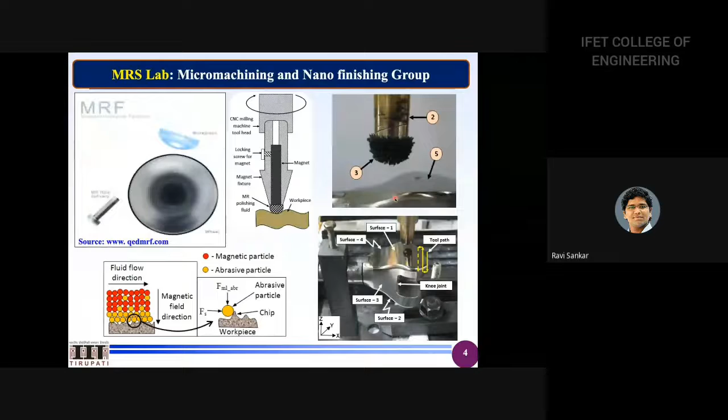So many more things are there in this one. This is magnetorheological fluid, which is externally energized - it needs external energy to energize. Otherwise, these are just liquids.

So there are liquids which are self-propelled. Those are called polymer rheological fluids, which you can come across.

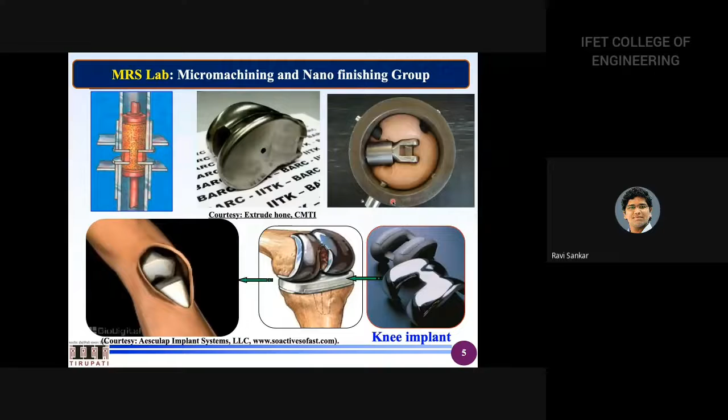I'm not going to explain this particular slide because there are a few slides related to this one coming up. So this has a capability to polish macro to micro scale features - I mean to say, micro features and nano features you cannot polish. So macro to micro features you can do.

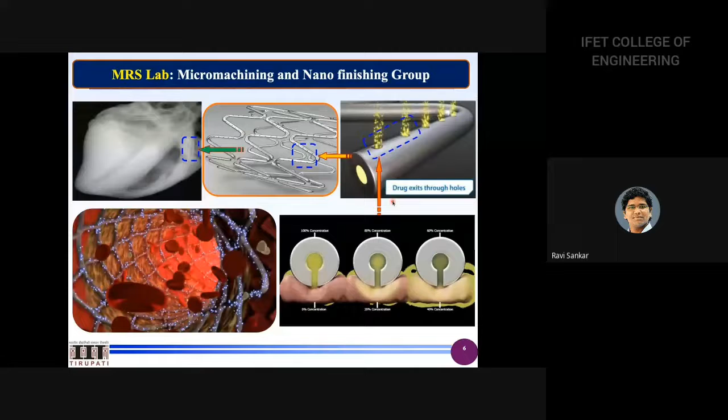Second is sustainable manufacturing. I don't know whether the video works. Okay, it is not working. Okay, so anyhow, the video is not working.

So whenever you do the machining operation, what is the advantage and disadvantage? The basic disadvantage is that a lot of temperature will be generated. To overcome this heat, what will you do? You will use cutting fluids.

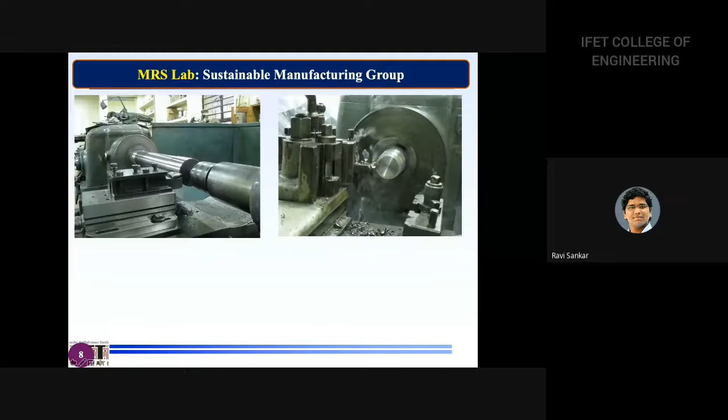Whenever you use cutting fluids, as you can see, this has a lot of emissions and the operator is standing here. These emissions have dangerous effects because these are carbon-based or crude petroleum-derived products, meaning the effects on emissions are similar to or more than those of petrol and diesel.

Why more than that? Because you are adding a lot of things. For example, what all do you add to cutting fluids? You add emulsifiers, biocides, high pressure additives - a lot of things to make a cutting fluid.

In an IC engine, you pour fuel and utilize it within 3-4 or 5 days. For example, if you take 1 liter or 2 liters of petrol, how many days will it last? Maximum one week.

But in this case, institutes will purchase a can of 20 liters of cutting fluid. The company knows that people will use it for a semester or two semesters. That means they have to use a lot of preservatives because you are going to add water to it. Whenever you add water to it, what will happen?

This has a very, very short life and microorganisms will form. To overcome that, people try to add biocides, which inhibit bacterial growth, fungal growth, and other things.

So this is positive, but on the negative side, those are chemicals. Whenever these chemicals interact with petrochemicals from pure crude oils, what happens? You get a lot of chemical interactions, and when these interactions occur at high temperatures like machining temperatures, it leads to chemicals which are very, very harmful.

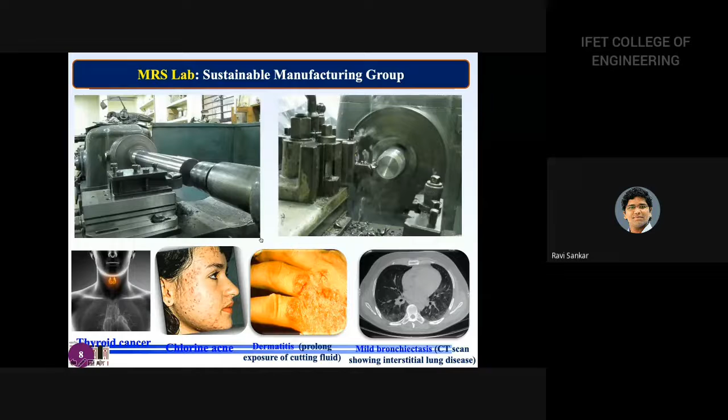You have to calculate that extrapolation. It is your primary responsibility not only to get profits for the company as an engineer, but also to protect your subordinates or working staff. My request is that you just need to give them appropriate safety precautionary things like mask, apron, and other things. I am not asking more than that, but this can save a person, and indirectly a family, since he may have parents also.

I am very thankful to IIT Madras for choosing this particular topic as a best paper award in 2017. This particular technology is about machining or micro machining using microorganisms.

What we try to do is take Acidithiobacillus ferrooxidans. As the name says, ferrooxidans has a lot of oxide molecules of ferrous. You need to culture it, populate it, and understand its life cycle most importantly. Then you can do photolithography of the surface, expose the surface, keep it inside, and get beautiful micro features exposed during the photolithography.

For example, you can see here micro nozzles and micro mixers, beautiful structures formed as per mechanical or micro manufacturing engineering. I'm happy about it, but I can also do the same thing with micro lasers and other methods, though in that case you will have thermally destroyed or thermally modified layers.

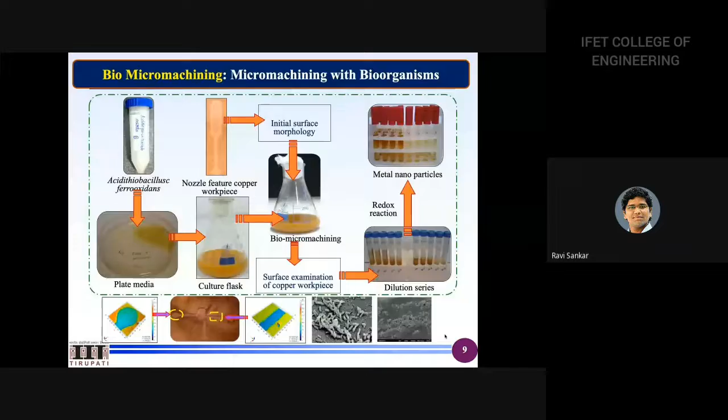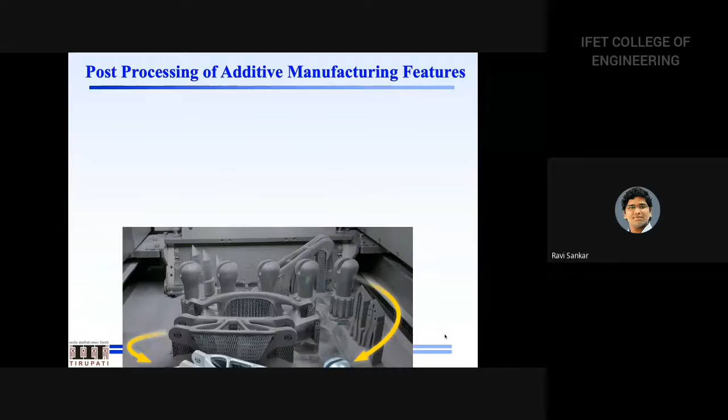Okay, so now we are coming into our business. This business is all about additive manufacturing. The additive manufacturing group works into various areas, and you can clearly see what additive manufacturing is all about. It is about conversion of any particular component that you are seeing here to this particular thing. If you can convert, you can use it into the practical application. If you cannot convert, you cannot use it into the practical condition.

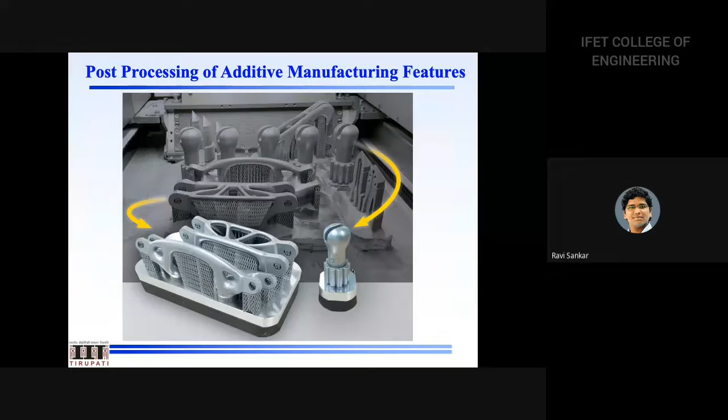So how to convert this to this, and this can be done by not a single process. You have to do multiple processes. What are the multiple processes? Basic additive manufacturing - we have powder bed system, direct metal deposition system, and the system with wire arc additive manufacturing and other things.

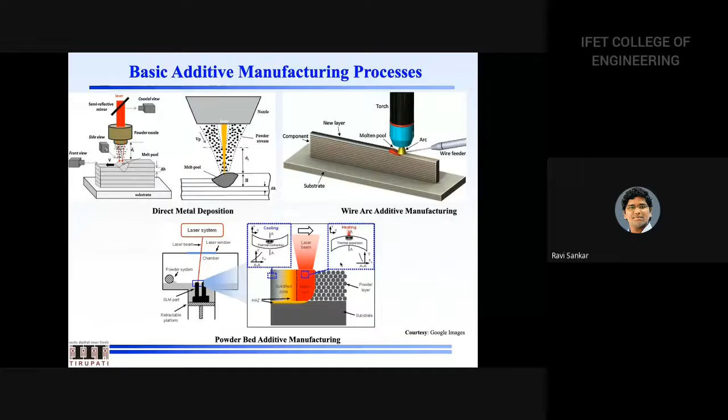Now you can see here selective laser melting and selective laser sintering. So many people get doubt, including me also - what is selective laser melting, what is selective laser sintering? If you go and Google it, because whenever you get doubt, the first and foremost thing anybody can do is Google. The first difference you will get is selective laser melting is for metals, selective laser sintering is for polymers, because nowadays polymer particle bed type of thing also is coming.

At this point, I would also like to tell you another hint about additive manufacturing. If your institute is going to purchase a 3D metal printer, I already said wait for 1 year. If you can wait for another year, you will get a universal type of additive manufacturing. What do you mean by universal type? I cannot really say universal type, it's just my way of expression. What I mean is the same system can do polymers, same system can do metals, same system can do ceramics also.

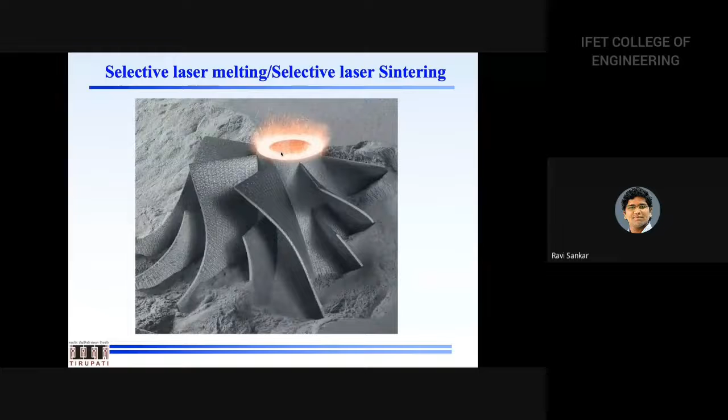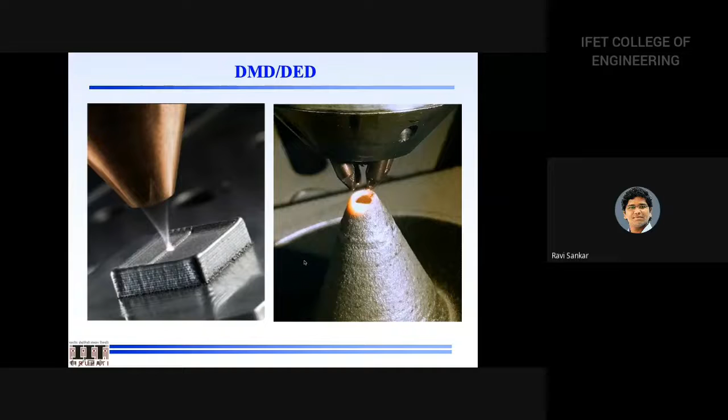Okay, so these are the various additive manufacturing technologies which you already know. What you might not be knowing is this particular direct metal deposition technology we will use. This particular technology we also use, as you can clearly see here, for bimetallic parts.

Steel on bronze, so this type of thing we are doing. As you can see here, whatever our students have deposited - H13, tungsten, niobium, these type of things. Currently what we have, the component is bimetallic components. So bimetallic components you can also do by WAM, wire arc additive manufacturing.

At this particular junction of time, wire arc additive manufacturing is widely used for large components. But forget about large components - you are sitting in a private engineering college, how can you do it? I was surprised to see one faculty in Andhra Pradesh, sitting in a private engineering college. Just this particular year, he sent me a message, I think 5 days back: 'Sir, this year I published 14 SCI publications with a top impact factor of 11.' I asked him, very good.

So what he has done is, he is working on additive manufacturing - a simple welding lab he converted into a wire arc additive manufacturing setup. So now you people who are all listening, from any state, it doesn't matter, this is open to you. You can convert your arc based welding system into a 3D printing system. Only thing is you need a hand, you can build on top of it, or you just have a rotary system and reciprocation system. These systems won't cost you much, like not more than 50,000 rupees or something.

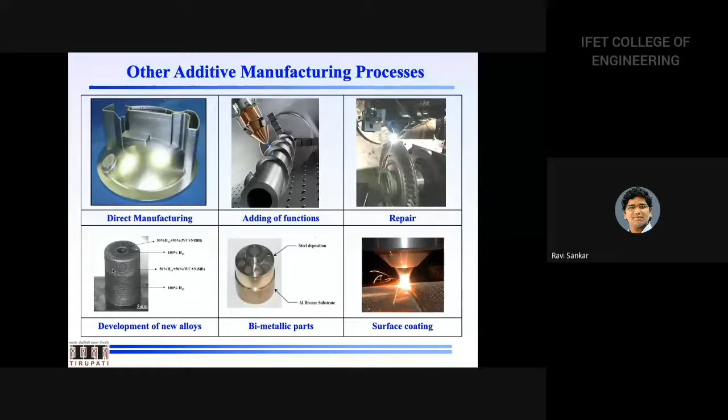Because we regularly do machining of additive manufactured WAM components, which are done by our colleagues.

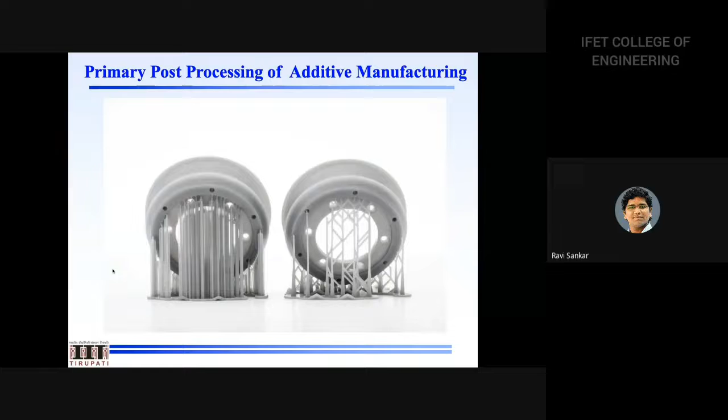Now, primary post-processing of additive manufacturing. So in polymers, the most important thing is that you need to remove the support structures. In metals, you need to dismantle your component from the base plate - that is another technology. For example, if you have built on a temporary build platform, you need to take that out. How do you take it out? One of the famous processes that we have is the wire EDM process.

Those people who want to work on wire EDM, at IIT Tirupati we have a 5-axis wire EDM machine. If you have any complex features to be machined using wire EDM, you can come. We have this particular system from Agie Charmilles, Switzerland. The worth of this machine is more than 1 crore rupees. So you people are most welcome.

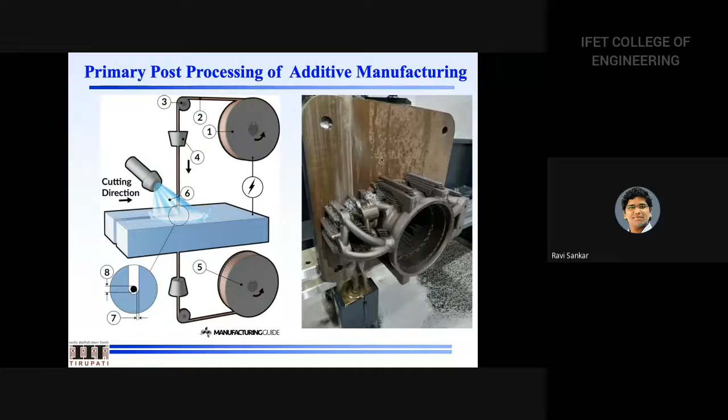As you can see here, how the component is dismantled - for example, you can see my cursor, this is the wire EDM and the wire. Most importantly, what you can get is our wires are so precise, like 250 microns, and these are stratified wires. Stratified means you have a sacrifice layer on top to make the component dismantling, or to cut a particular component into a perfectly shaped component.

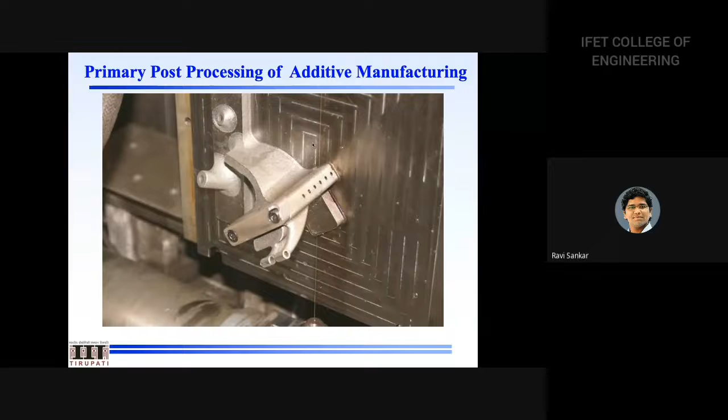The second thing that we try to do is machining of 3D printed surfaces. We not only work on machining 3D printed surfaces by lasers, we also work on electron beam and plasma beam for additive manufactured features and other things.

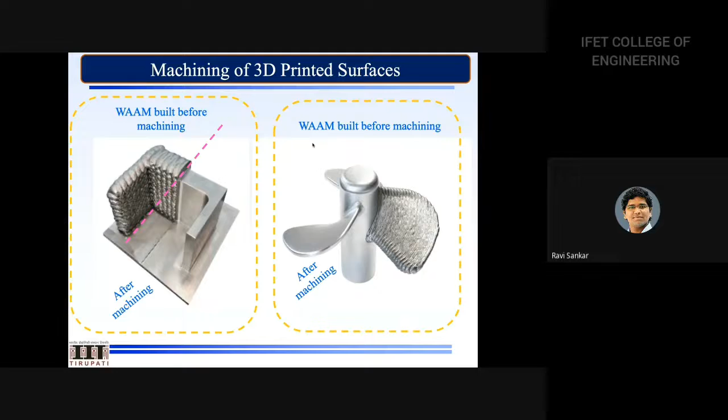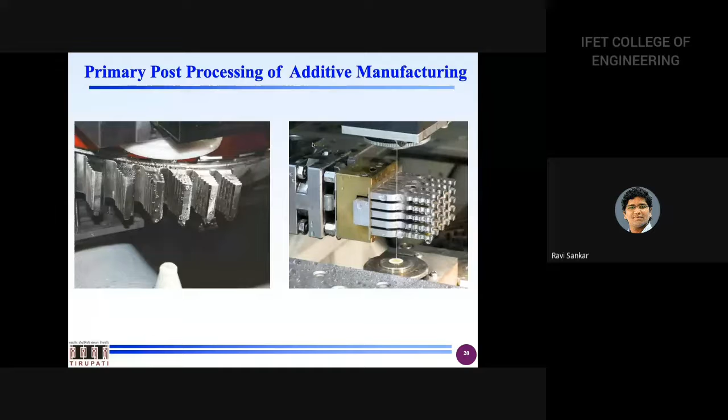So, machining and similar processes are the two big things required at the start of any particular component to be post-processed. Once you dismantle it, the surface roughness, if you can see here, is very, very rough. So how to overcome this?

If you take the surface roughness here, the levels will be, as per my understanding... I have a bad habit. Since 2002 I've been working in surface finish, so by seeing the surface finish itself, I can tentatively say how much it will be. Sometimes I'm right, sometimes I may be wrong. That's it.

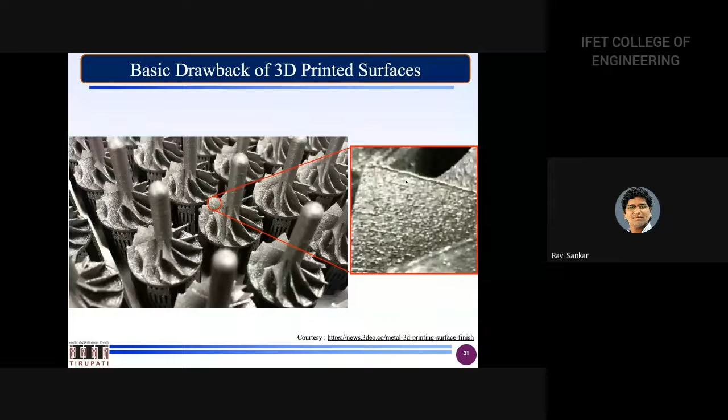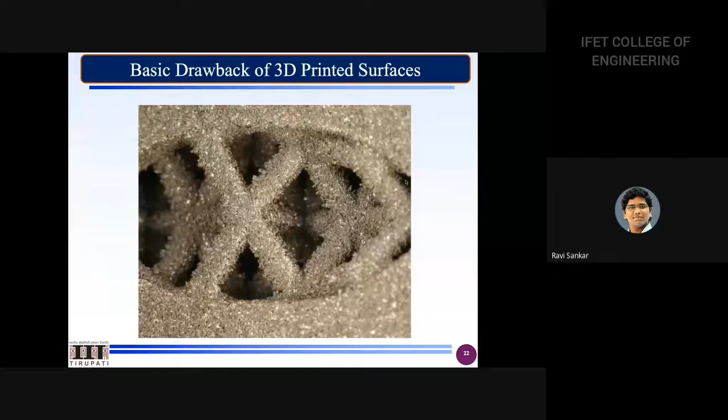In this particular system, I expect, and you can also clearly expect, it will be more than 20 to 30 microns. How to use this in practical application? You cannot directly use it. For example, take lattice structures - how do you polish lattice structures? They are very, very complex to polish. Till now, there are no good technologies to polish lattice structures and other such things.

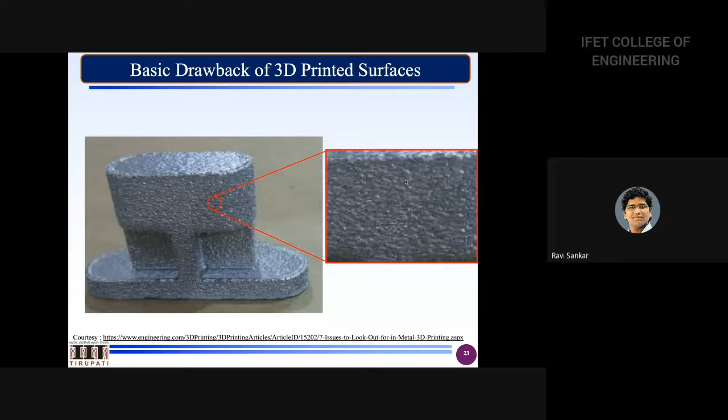So those people, if you can find... okay, now you can see here, I was just taking some tea. So, the drawback of 3D printed surfaces - now you can do machining as well as similar processes. That much you have done.

Another option for you is if your institute is well-rich. In Tamil Nadu, there are big, rich institutions. You can go for the DMG Mori Hybrid Machining Center, where you can deposit using a directed energy deposition system, and at the same time, on the same machine, you can also do machining operations. This is called a Hybrid Machining Center. But the price of this particular machine starts at 7.5 crores, so if your institute is rich enough, you are most welcome to go for this process.

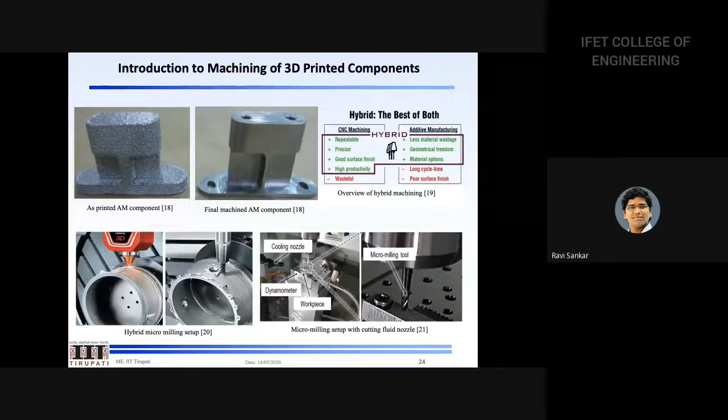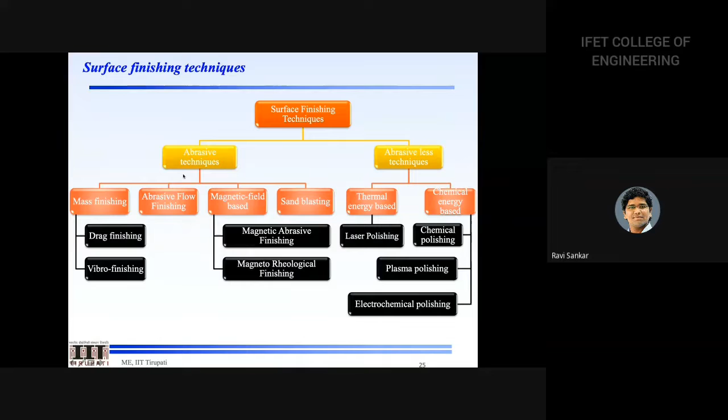Now, surface finishing technologies - we have abrasive finishing technologies and abrasive-less finishing technologies. These are the common post-processing technologies used in industry in India.

First, they will go and blast with sand blasting or bead blasting and other things. Second, if corrections need to be done on large surfaces, they can go for hand polishing, like with a hand grinder. If there are internal features not accessible by these methods, they go for ultrasonic polishing. If there are still some problems, you can go for electrochemical polishing or chemical polishing. Normally, chemical polishing comes first, followed by electrochemical polishing.

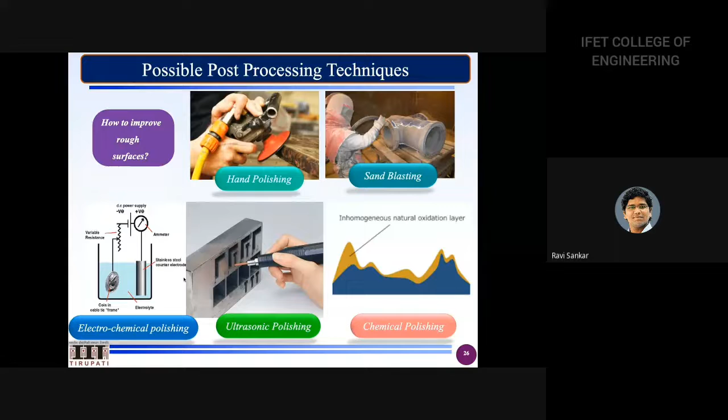Now, these are the standard protocols Indian industry follows. What about abrasive-less methods, and what are industries doing? Coimbatore is a very good industrial city where you can find technologies like chemical polishing of structures - there are chemical and electrochemical anodizing plants and other things. These are the common technologies people use for finishing normal components as well as additive manufactured components.

There is a startup at IIT Bombay called BETiC, headed by Professor B. Ravi, which manufactures implants and other things. If you want any institute to get that center, I don't know whether they will give it to a private institute or not.

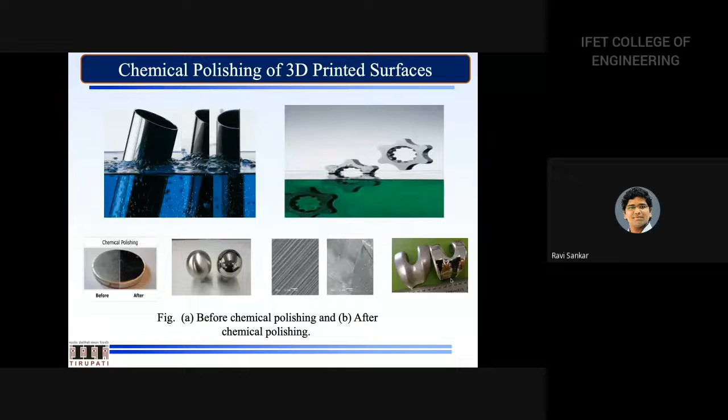So recently when I was discussing with professors, they said that if you want a center at IIT Tirupati, do let me know. They will help you people explore some technologies that you can use to open a startup company and other things. That is the information I can pass on.

Lattice structures are normally polished by chemical polishing or electrochemical polishing only, because these are very complicated in nature. For example, these are the surfaces as 3D printed, and after polishing, it will look like this.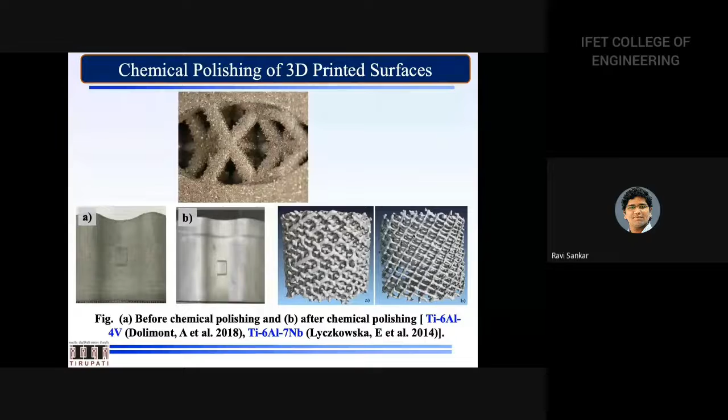These are very complex, and currently in India we don't have such technologies for polishing lattice structures. If you have external surfaces, it is very easy to do the polishing and other things.

Laser polishing is another area where we extensively work, because currently we are also procuring some lasers, multiple lasers, not a single laser. Some lasers are good because whenever you do laser polishing, it is laser remelting only. You already have a laser melted surface, since a 3D printed component is a laser melted surface from selective laser melting. So on top of it, if you do laser again, what is there?

Already you have taken a dip in Ganga. If you want to take a second dip, what is the problem? The first dip itself is a problem, you will get cold, like that. So in the second dip, what is the problem? Already you have taken a dip, you take a second or third dip, it's not a problem.

So already it is done by laser. Normally the laser used in selective laser melting is in the range of 400 watts to 700 watts, sometimes going up to 1000 watts, sometimes using multiple laser sources. As per our systems, we try to use a maximum of 100 watts, if not 200 watts. Why are we using this? Because it is contact free and eco-friendly.

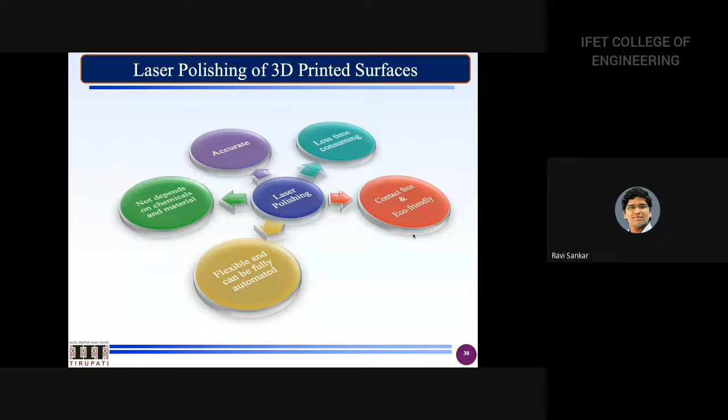Laser polishing is less time consuming and accurate, because it is accurately controlled and does not depend on chemicals and materials. It is flexible and can be fully automated. There are two systems we are procuring: one for laser polishing, another for laser shot peening, because you can do polishing by that technology also. Let's see how the mechanism works.

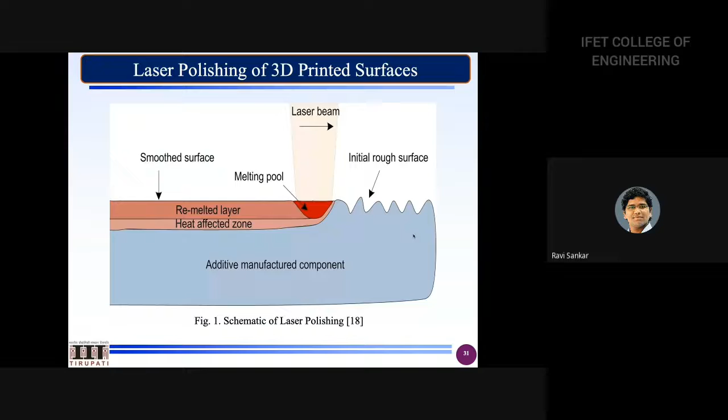The laser smoothing effect you can see here is purely a remelting process. A molten region already exists, you are just concentrating on the peaks and doing material remelting. There are various input parameters here, and laser power is the primary parameter. How much power? As I was clearly stating in the previous slide...

The power utilized for the laser melting process or selective laser melting process is 400 to 700 or 800 watts, roughly 400 to 700 watts. On average, you can take around 550 to 600 watts as required. But here you require only 100 watts because you are concentrating on the peaks where the surface area is very small.

So the first parameter is power. Second is scanning velocity. If your scanning velocity is too high, partial melting will take place and fall into the valleys. So you should have appropriate scanning velocity.

Laser beam diameter is important, particularly for polishing. In laser beam melting or selective laser beam melting process, you concentrate to a point because you need an accurately built component. Here, you don't want that because you want to concentrate on a particular surface.

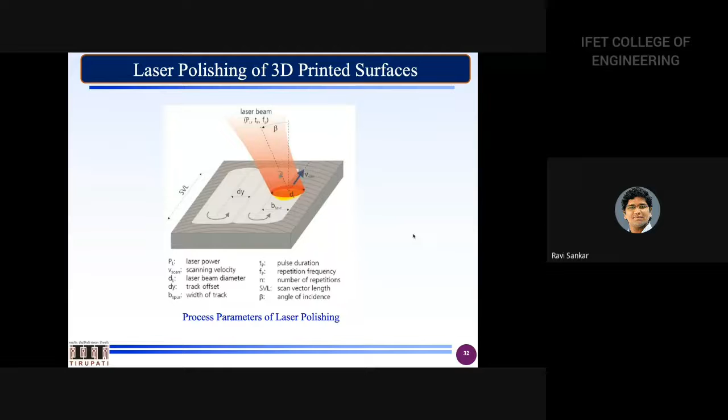Some people are also working on the angle of incidence. They do this because of the Gaussian beam distribution - if you see it, it looks like a 6 sigma curve. At the center it is very peak, and at the edges it is very less. That means you don't get proper melting and evaporation on both sides of the Gaussian beam distribution, for which they try adjusting the angle so the central portion can again and again be applied onto these layers.

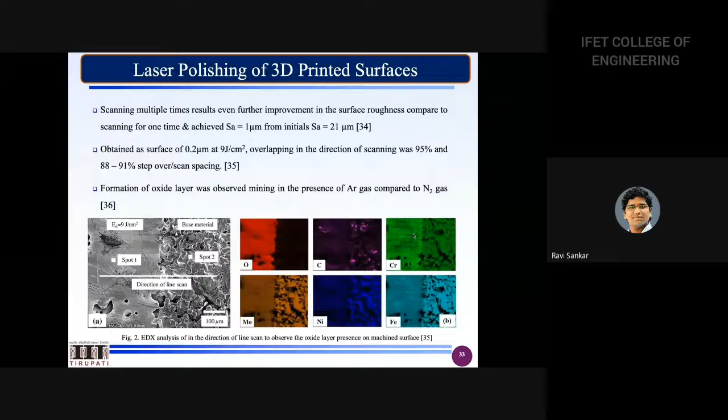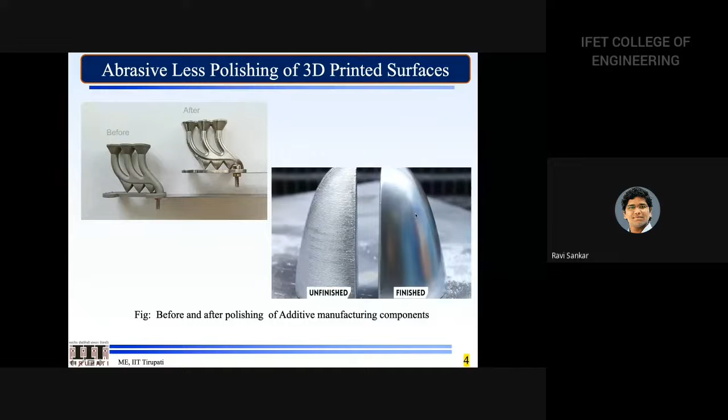Now you can see here, we have tried laser polishing on metals, but we want to do it on ceramics too. That's why we tried on ceramics like silicon carbide and others. These are the applications - once you understand the science, you can do a lot of these abrasive-less polishing techniques such as electrochemical polishing, laser polishing, chemical polishing, and so on. As you can clearly see here, this is the unfinished layer by layer deposition, and here is the finished one. So these are the applications of it.

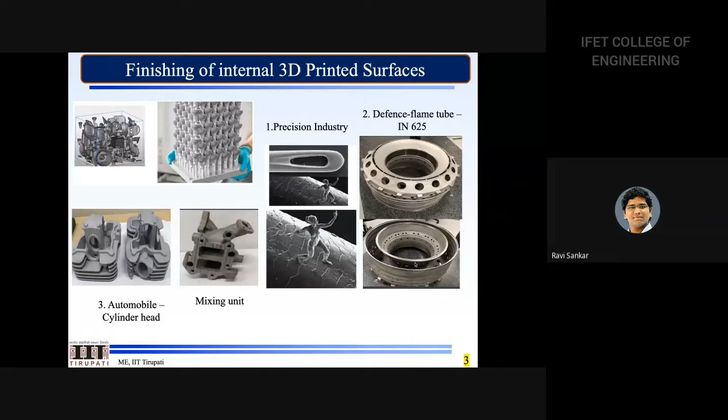Now we are moving into abrasive-based post-processing technologies, for complex features, internal features, and other things. The first and foremost thing you can do with abrasive is blasting or mass finishing operations like sand blasting, drag finishing, and other things. At IIT Tirupati we have a drag finishing system, which is yet to be installed - it came almost 3 to 4 months back, but because of scarcity of space, we have not installed it yet.

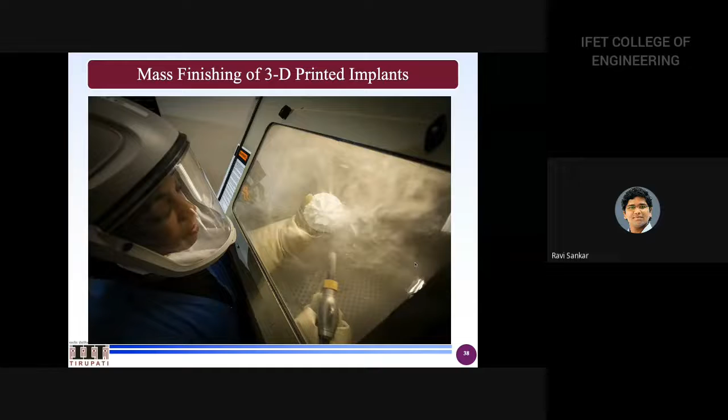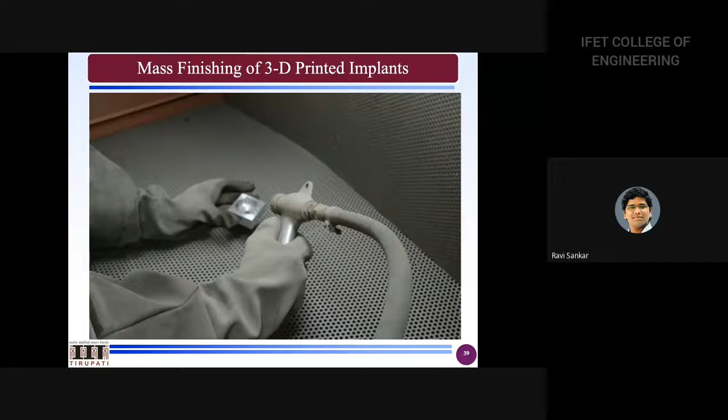This is called bead blasting or sand blasting, where you can remove particular particles by blasting, or you can also remove some of the supporting structures by these blastings. As you can see here, the components' internal surfaces and other things are done under a controlled environment or a closed loop system like a glove box and other things.

As you may be well aware, the surface roughness in additive manufacturing is very, very rough. Sometimes this is advantageous, so now you have to find those areas where it is advantageous.

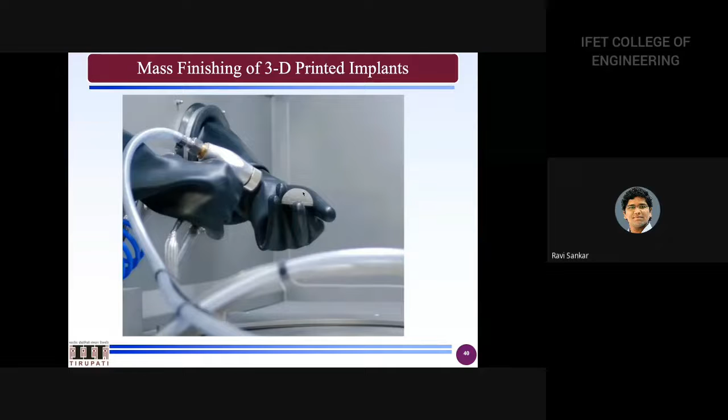One of the applications is the acetabular socket. For hip implant applications, it is very useful because you require osteoconductivity and osteointegration onto the top surface of your acetabular socket. You can clearly see here - your acetabular socket is here, and this particular surface needs to be very rough. Because this should be a biomaterial, and this will go and stick onto the top side of your hip implant, osteoconductivity and osteointegration will take place.

The second process you can see is vibratory bowl finishing, where you have a lot of abrasive particles, and you just rotate it. So whatever you rotate, automatically it will experience the finishing and perform the finishing operation.

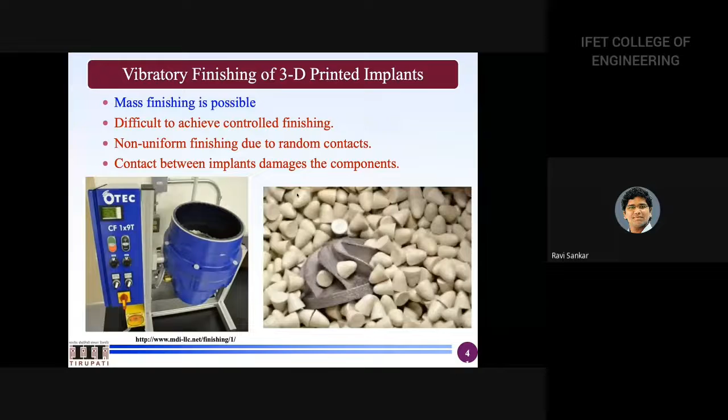Other processes include belt grinding and drag finishing. Drag finishing is one of the widely used processes for 3D printed components and for batch and mass production. The basic drawback in the previous system is that you dump everything into a bowl and rotate it, so there's a chance of component-to-component interaction. But in drag finishing, all components are fixed, so there's no chance of components hitting each other, and deformation problems won't occur. That's why people prefer drag finishing.

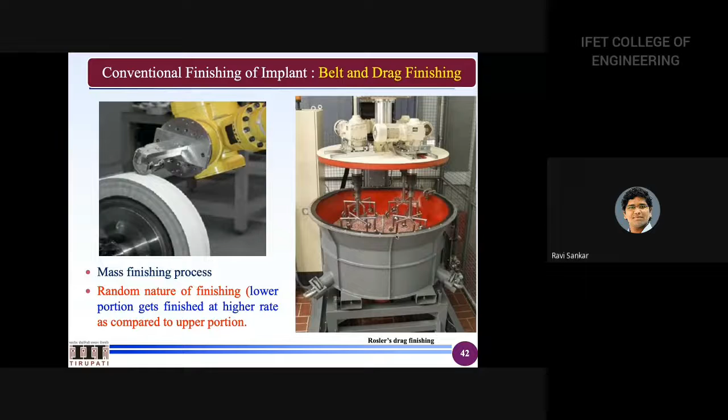As I said, Coimbatore is an industrial place, and many companies produce this type of drag finishing system. At the same time, additive manufactured features or implants can be finished by belt grinding and other processes, as you can see here.

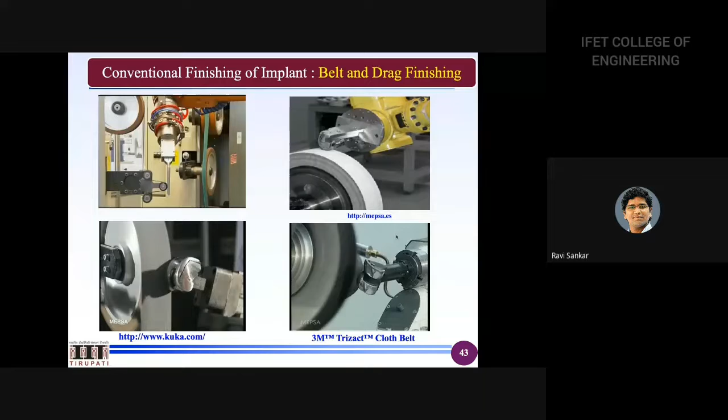There are multiple things one must understand here: interaction forces. For example, in this bottom two, interaction forces are very high because the material removal is very high. That's why you see a lot of spark and fire type effects. But here, in this cloth grinding process, you don't find that. So interaction forces always depend on what type of material you are using. Here it is a very solid one.

Here it may be a rubber wheel or a sponge type wheel where abrasive particles are put into a liquid mode or something, and that's why you see a lot of deformation. From this, you can understand that if you convert from solid to liquid, or a semi-solid, or a nearly porous solid, you can achieve less interaction forces.

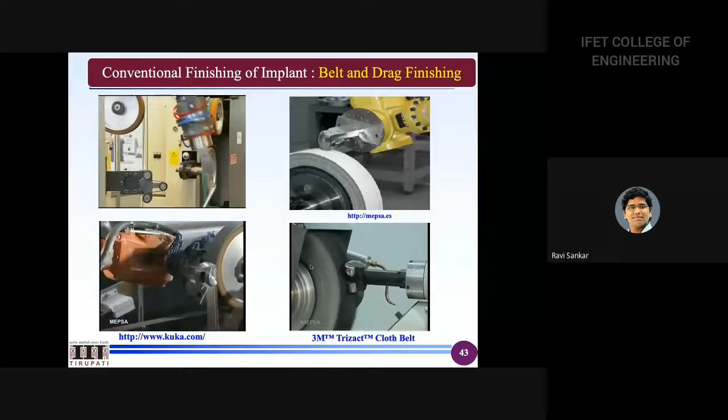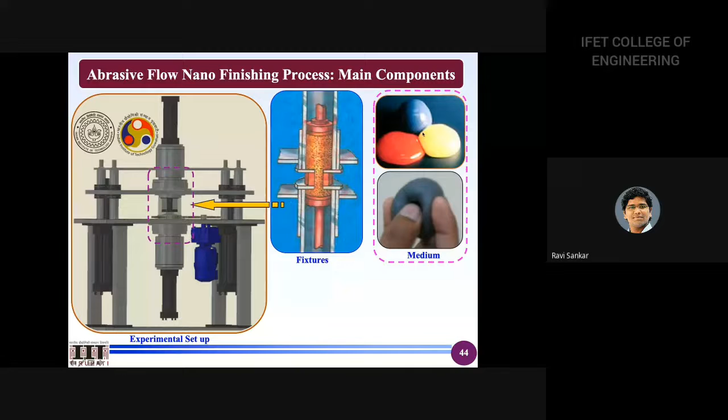The third and most important element is the medium. One year back we received a patent on this medium, and we are filing other patents in this area. We have multiple varieties, while commercially available mediums are only three. In our case, we have almost six to seven varieties of mediums.

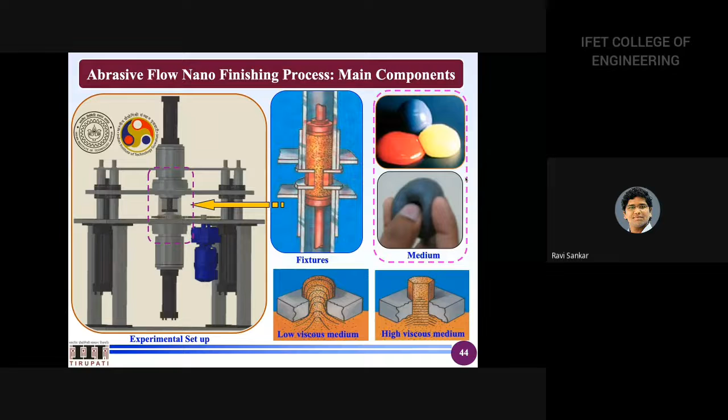There is a company in Coimbatore that regularly asks us for this technology. Because of some technical and non-technical issues, we are still unable to hand it over, but we have to go a long way to develop this system further. Currently we are at TRL 8. Whenever we give this technology to a company, we want to make sure we don't have to come back again, so before launching it in a full-fledged manner, we want to reach TRL 9. That's the reason I conveyed, and he was happy about it.

So this particular technology works in a simple way. I cannot explain the complete details of how the liquid works, but for example, I have this particular liquid, which is a semi-solid type. Whenever I apply extrusion pressure, the particles inside it, which are functionalized, act on the surface.

These abrasive particles, for example diamond abrasive particles, are functionalized such a way that your polymer network holds it. So what is this polymer network all about? This polymer network is a viscoelastic polymer, and whenever you apply a shear force in this direction...

What it will do is, it has a viscous and elastic component. The elastic component tries to move in the perpendicular direction, and the viscous component tries to move in the direction of applied force.

How do you know? For example, if you take water or honey or anything into your hand and throw it, what will happen? It will flow along the direction of what you have applied pressure. That is called the viscous effect.

Second, the elastic effect. Take an eraser - many of you are married and have children, so you have one at home. Just take an eraser and try to press it with your thumb. What will happen? It will try to move in the perpendicular direction.

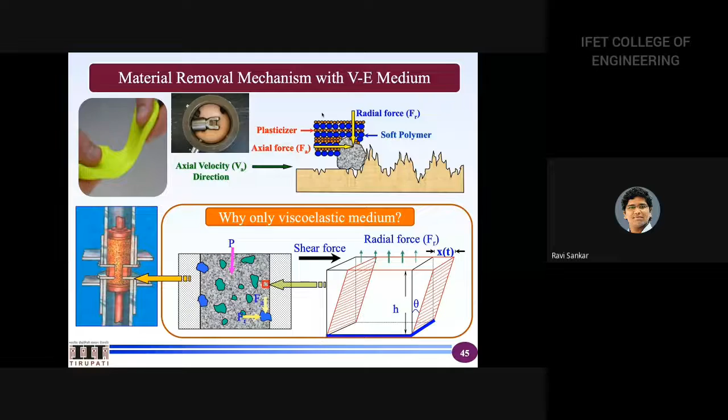But indentation velocity is much, much less compared to your axial velocity. That's why normally they don't consider the radial velocity. So this is about the materials, but these are 2003-2004 materials which we have already patented. That's why we are showing you.

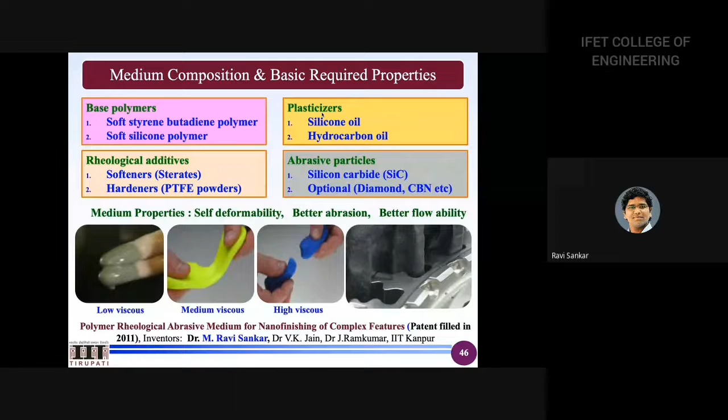Nowadays people are not accepting these things, however we have moved to the latest materials which I cannot disclose at this point in time. But the characteristics are: it flows like a fluid, jumps like an elastic ball, breaks like a plastic piece, and other things. Because of this, the uniqueness is that flow and deformation characteristics are very complicated in nature.

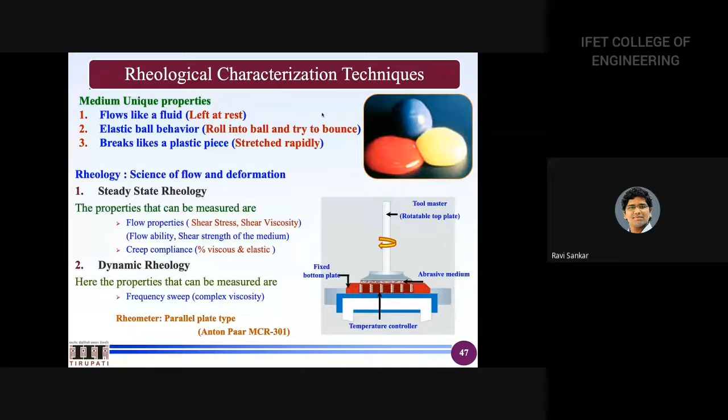For which you have to do rheological characterization. The rheological characterization - for example, the first and foremost characterization is flow studies: how it behaves while it is flowing. This is the flow behavioral study.

The science behind it is: you have elastically dominating viscoelastic materials, or purely elastic polymers - nothing in this world is perfectly elastic. So you have dominance of elastic characteristics because your polymer networks are near each other, so the inter-polymer molecular distance is less, and the force of attraction between two polymer molecular chains is very high.

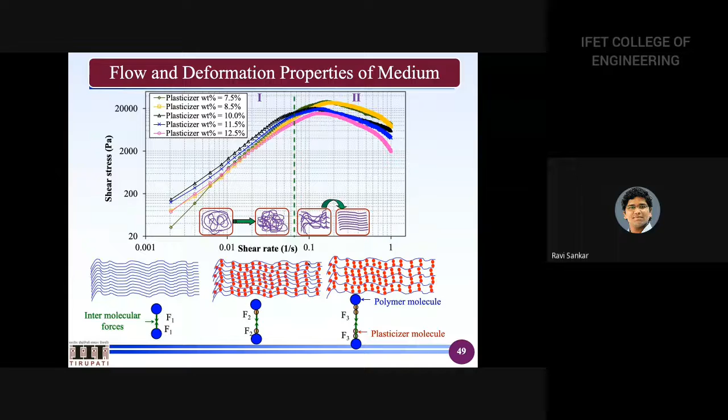So you need to use a lot of functionalizers, rheological additives, and other things. That is the bread and butter of the companies and patent technologies, which you don't find in the patents. Normally you will find the patents listing plasticizer, polymer, and other things.

So you may be getting doubt about viscoelastic and other things. Whenever you talk about viscoelastic, how to measure the viscous component is a big question, for which normally you can see on the time domain and frequency domain you have creep compliance. That means you are putting some stress and observing some strain. Now the million dollar question is: what is the stress that I have to apply?

For which you have to do the dynamic rheology, where you can change the shear stress and observe the storage modulus. Whenever you are observing, there is one region where there is no change in the storage modulus, that means my polymer molecular chains are at original state. If I use anything in this range, it is called the linear viscoelastic range, beyond which you can see non-linearity, and this non-linearity is because of polymer stretching or polymer breakdown.

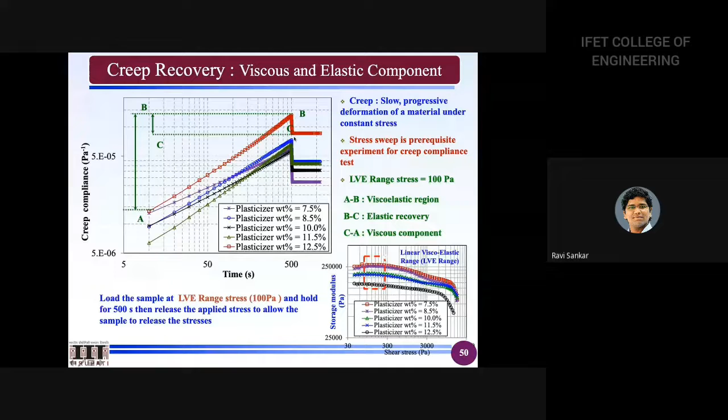So if I can take any particular value where the storage modulus is approximately same, that means my polymer molecular chains are at original state, neither broken nor stretched. If I take any particular value in this range and put it in the viscoelastic range, and I'm putting 100 Pascal here, A to B is viscous and elastic, and B to C is elastic. So now you can calculate what is the viscous component, what is the elastic component.

So now you can use percentages to show or observe how an elastic dominating medium and a viscous dominating medium works. In this case, if you take 35% viscous, that means 65% elastic. So elastic, as I said, radial force will be very dominating, and not only polishing, it also creates its own shearing marks. That is what happened here.

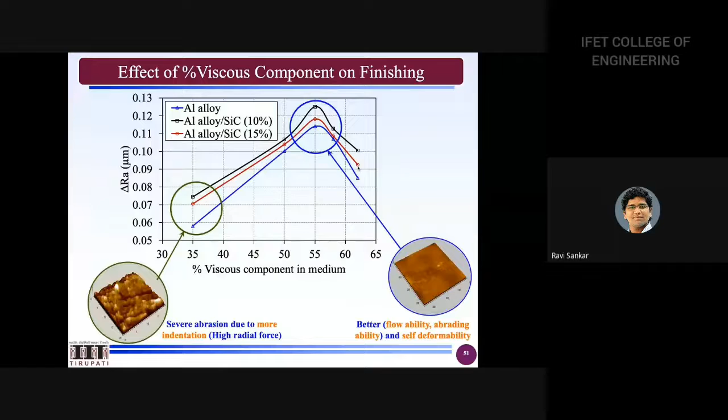As you increase your viscous component, you will get better characteristics and finishing. Beyond which, if you go, it will just simply slide, and good abrasion will not take place. Once you understand the science, you can see your impellers, turbines, and other things can be polished clearly. Only thing is you need to play with respect to which type of medium you require.

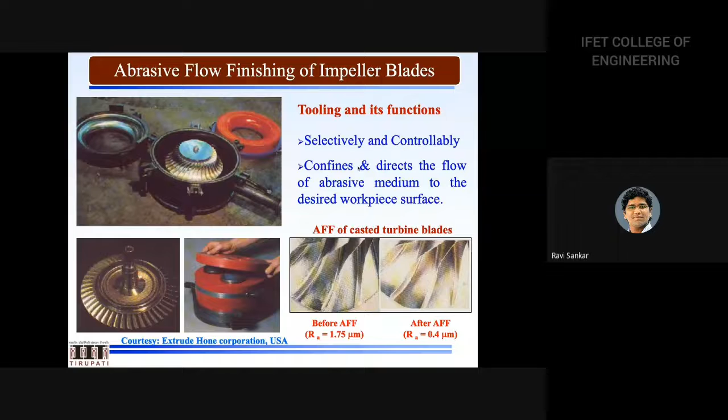Here the component size is very big, so you can go for high viscous medium, and you have to design your fixturing accordingly. So now, 3D printed components, as you can see here, before finishing and after finishing, this is how it looks.

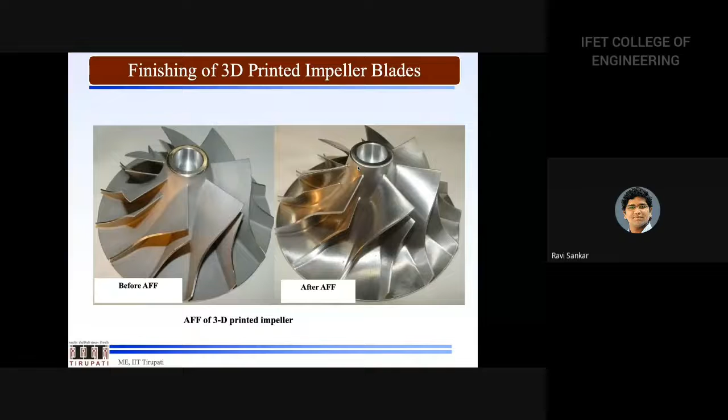Only thing is you have to have the recipe. If you have wheat flour, you can make chapati, puri, dosa, parota, anything, samosa also you can make. Only thing is whether you have that wheat flour or not.

So these are large structure components polished by extrude hone companies. And you know what is the charge? The charge of this particular finishing goes beyond 10 lakhs, because the medium cost comes from the US, I'm not talking about my medium. Why we have developed this medium is, in the market, this particular medium, 2 kgs ranges from 3 lakhs to 5 lakhs, depending on your requirement and what type of abrasives you want. If you go for diamond particles, it may be very expensive, like 5 lakhs rupees for 2 kgs.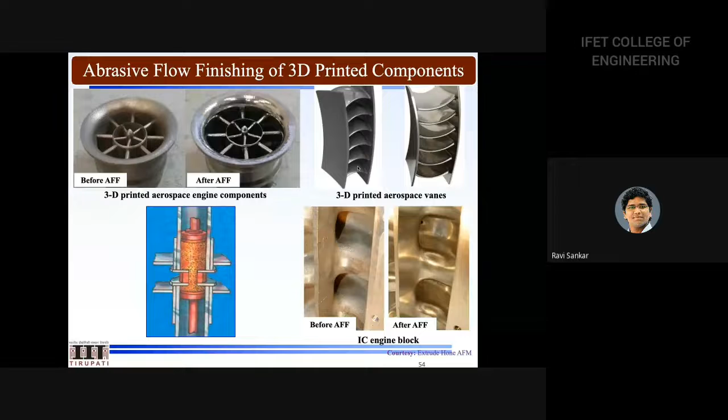For your system you require a minimum of 10 to 15 kgs. That means for one run, if you want to make this particular system, 5 lakhs into 6 or 7 times, so it will be minimum. The medium charge itself is 20 to 25 lakhs. So that is the patented technology that we have done.

And as I said, Rome is not built in a day. This fort, I can say Satavahana fort or any fort, which we have built from 1996 onwards. Now we are in a position to commercialize.

As I said, we are still having some repeatability issues. Those things are to be resolved by doing thousands and thousands of experiments to provide the input conditions to the industry, because industry says we don't have time, we want to press a button, we want output, that's all.

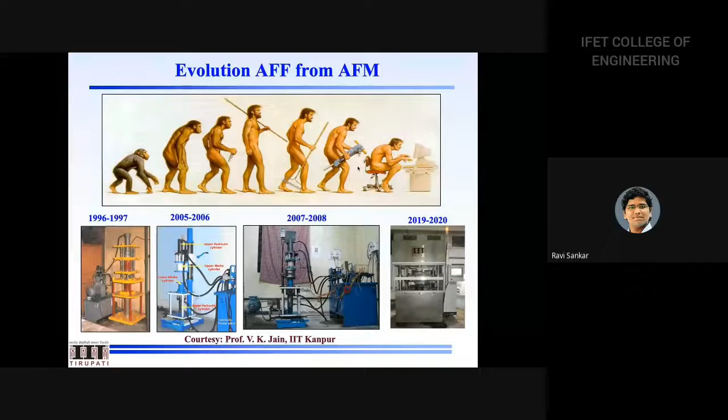So at that level, we are making it into a smart system, as you can see here. We try to make a smart system. As I said, we work on the PPP mode: publications, patents, and products. So this is our first product that we are working on, an HMI system, that is human machine interface system, and other things.

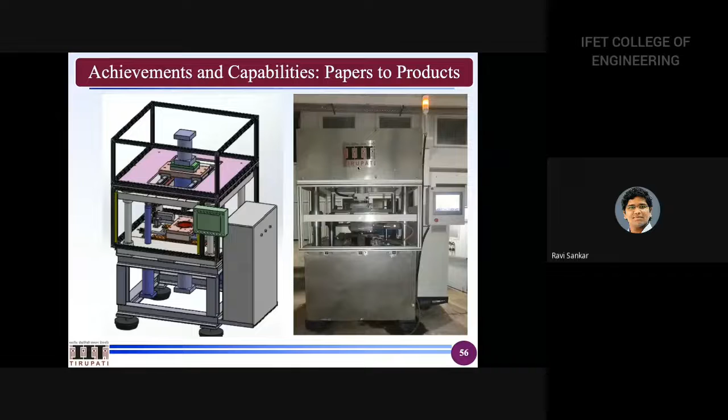This is the technology that we have already given to one of the leading research laboratories, such as CMTI Bangalore, and this is already working fine. So this will give us feedback, and we have our own system that will give feedback. So these feedbacks we are going to take, and we are going to come up with a very solid system in future.

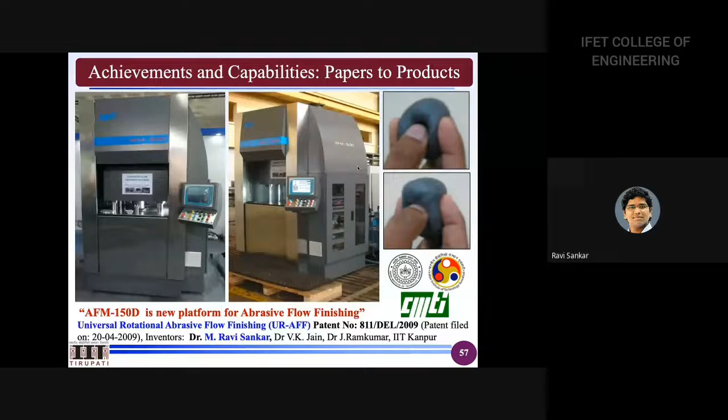Thank you one and all for your patience. As already the introduction says, I am a guest editor and other things, and I'm going to be a guest editor for one of the SCI Index journals. I will come back to you in a couple of months or something.

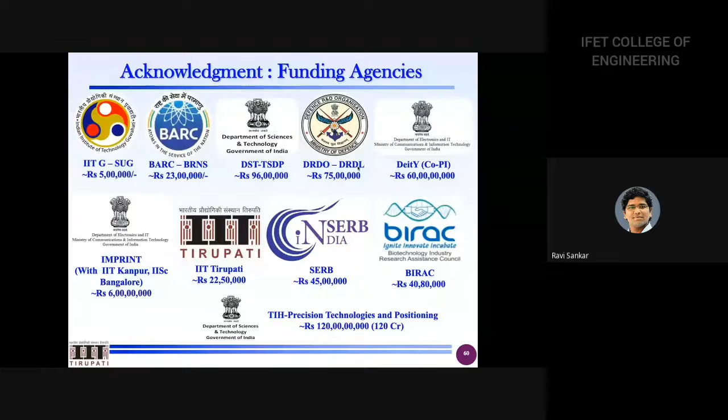At the same time, I'm very thankful for many of the students. If you can see here, I have many students from NIT Trichy and Anna University Guindy.

One student is there, I think he is from Trichy. No, Rajkumar, K. Rajkumar. He did his BTech in production engineering from Anna University Guindy. He came to me when I was in Guwahati, in 2014 I guess. Within 2 months he put in very hard work, and he published 3 publications after doing a lot of work, then went back to the university and published 3 publications. He went to University of Cincinnati for his masters, and currently he is in Carnegie Mellon doing his PhD. I think he is in the completed stage or something.

So we are open for dedicated and hardworking students who can come up. At the same time, we are also open for winter internship, which is going to be online. So those who are interested can start their winter internship and then pursue their summer internship, because once you come here and start doing literature survey and other things, you cannot do experiments.